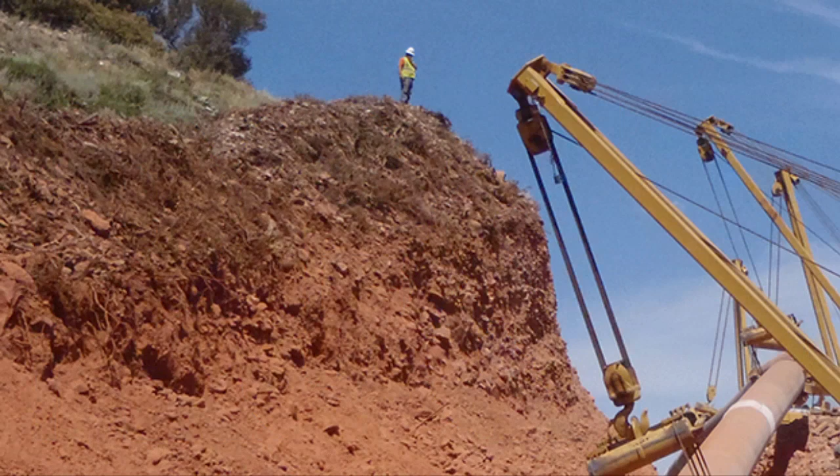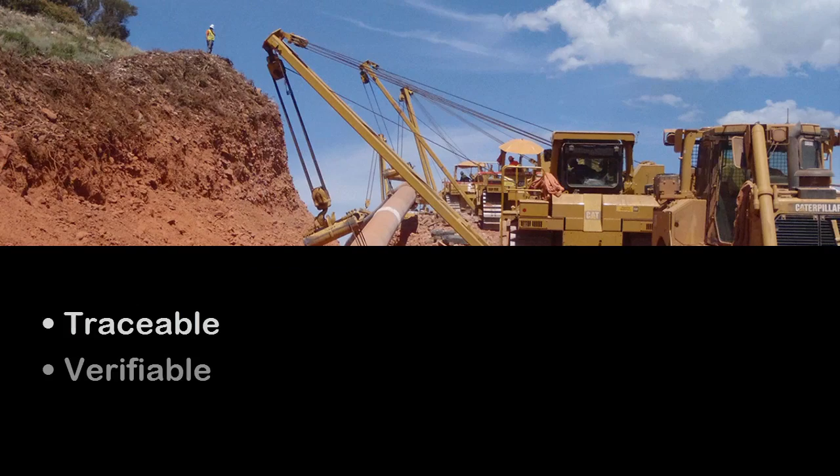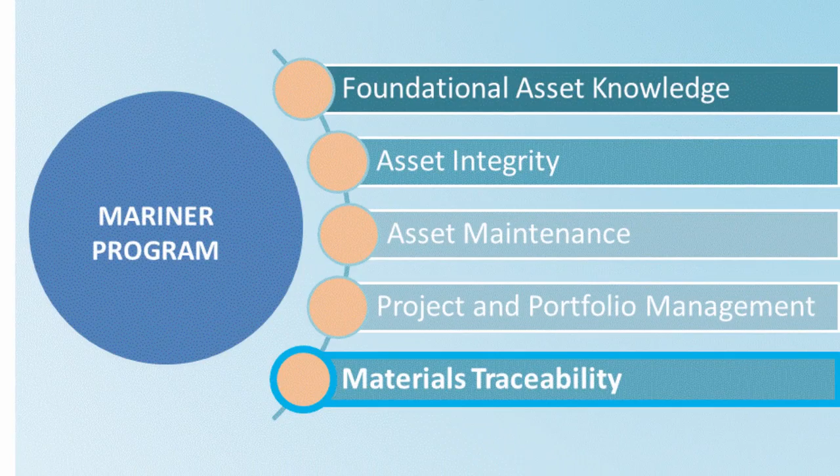Materials traceability is one of a suite of improvement initiatives that make up the Gas Operations Mariner program. This project establishes an industry-leading standard and process to ensure gas transmission materials and components are traceable, verifiable, and have complete materials records. Like the other Mariner programs, Materials Traceability is an initiative created to enhance the safety of PG&E's gas transmission system and improve the accessibility and reliability of pipeline system asset information.

Materials Traceability represents PG&E's high-level compliance commitment, launched as part of the 2011 Pipeline Safety Enhancement Plan filing. By December 2015, it will be fully deployed and integrated into our core business process.

Materials traceability will enhance public safety by establishing an industry-leading standard and process for gas transmission. It also ensures that all related gas asset information is accurate, complete, and readily accessible.

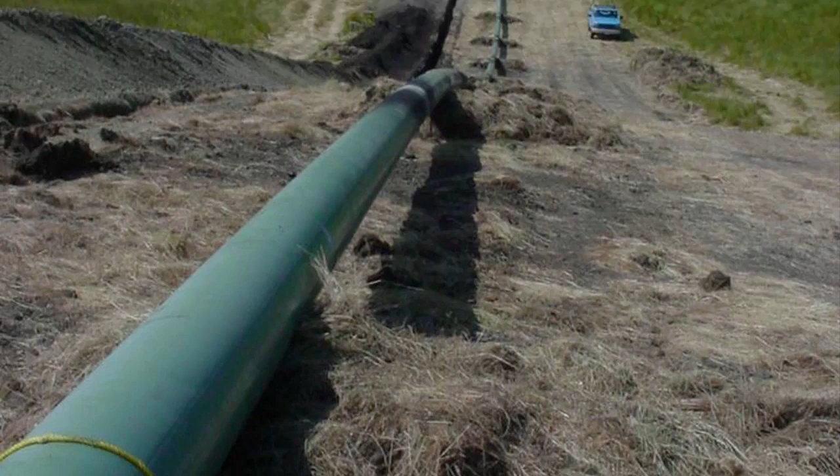Here at PG&E, we understand the importance of tracing materials used in our pipeline systems, and we are committed to meeting and exceeding our regulatory compliance requirements.

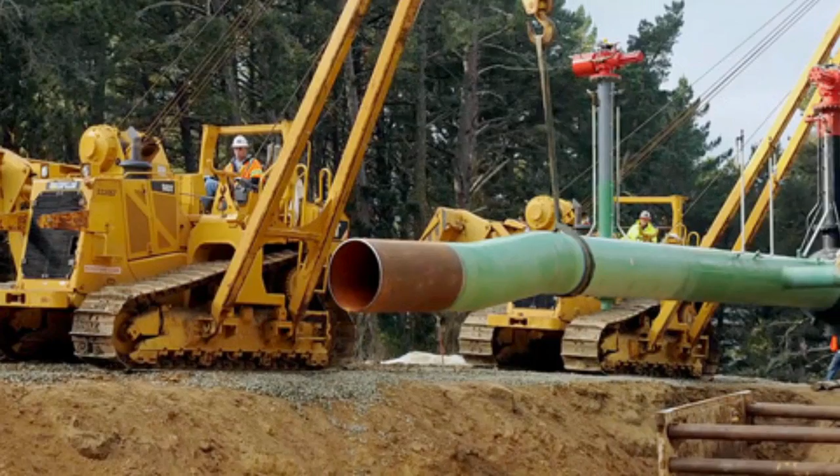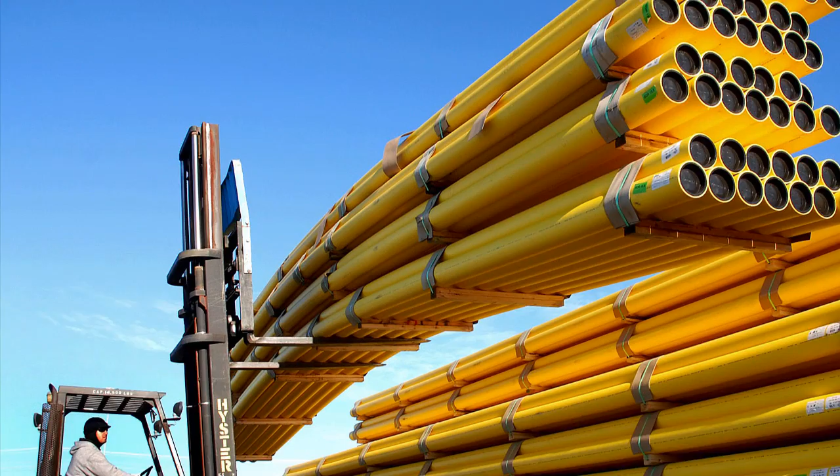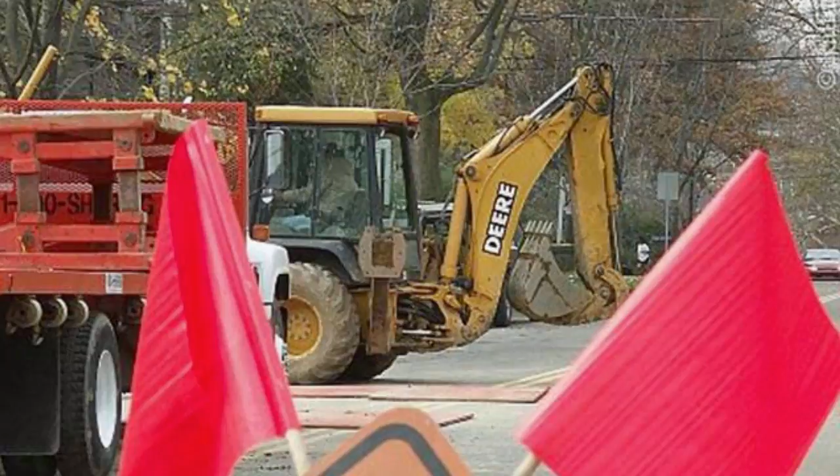By December 2015, our existing business processes will be enhanced with the ability to track materials origin and locate where batches of gas transmission materials are installed within the system. Also, we will have easy access to complete materials information for all transmission assets, preventing issue and installation of recalled or non-qualified materials.

In order to become the safest, most reliable gas company in the United States, we need to transition to modern data management systems.

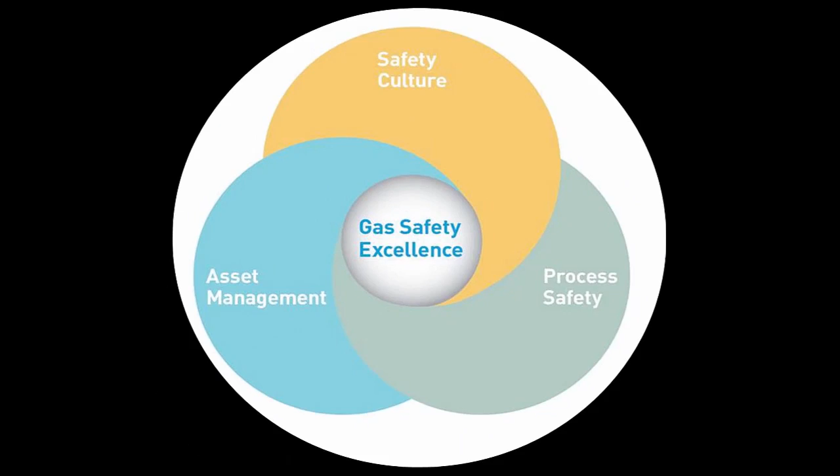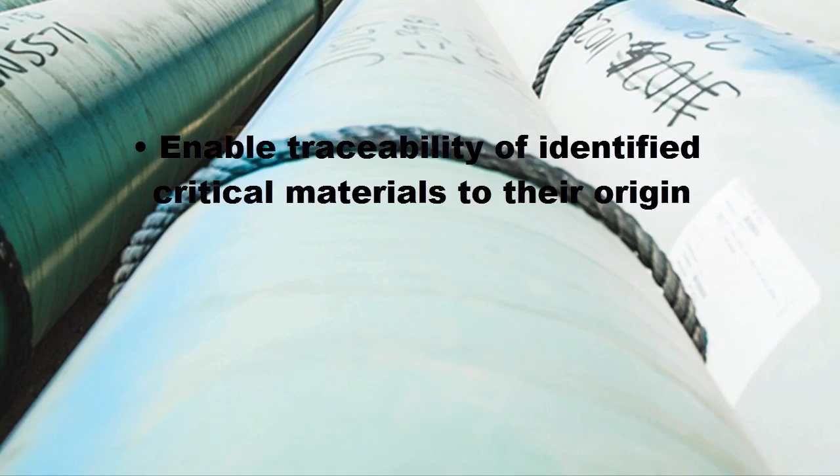What are the benefits of materials traceability? Using a combination of materials tagging and SAP batch management functionalities, the project will enable traceability of identified critical materials to their origin. It will enable PG&E core systems to capture and link traceability documentation to materials.

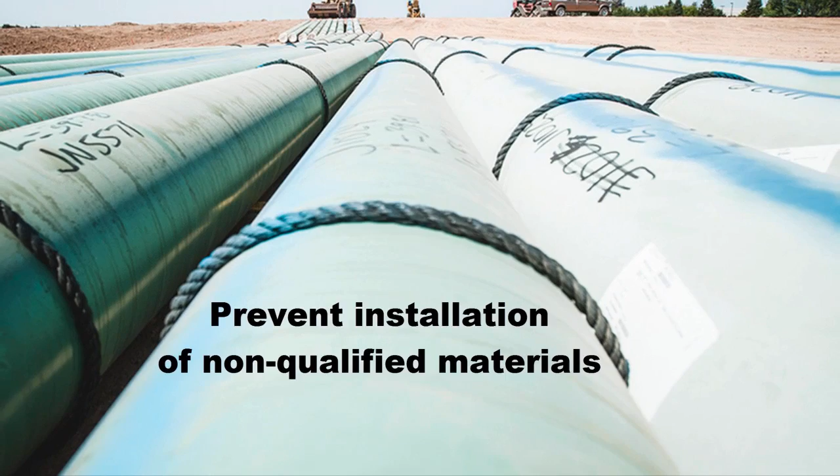We will ensure that materials issued to a construction job are traceable and remain traceable. We will prevent installation of recalled or non-qualified materials and identify where traceable materials are installed.

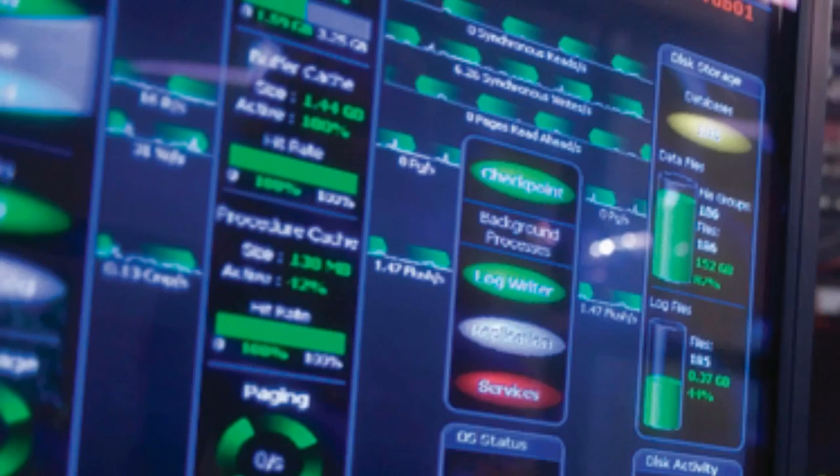Enhancements will include the use of SAP and Documentum to capture and manage the necessary information to ensure traceability, and will minimize the paper and manual steps needed for critical materials information to flow through to a construction job.

Materials traceability represents a lot of change. For many, it will represent the trifecta of people, process, and technology change. Numerous departments will be impacted, resulting in the adjustment of some current processes as well as the creation of new processes. Who was involved in the change design?

Experts from various organizations impacted by this initiative have participated in its development, testing, and deployment planning. From initial requirements workshops to final testing in the field, the team has consistently sought out the ideas, concerns, and recommendations of those affected by the changes.

It's big. Materials traceability impacts multiple PG&E organizations, as well as our materials suppliers and third-party business partners. From codes and standards and engineering and design personnel to supply chain teams such as sourcing and procurement, supplier quality assurance, and warehouse, to PG&E and contract construction crews, materials traceability will affect the daily activities of our employees, contract resources, and suppliers.

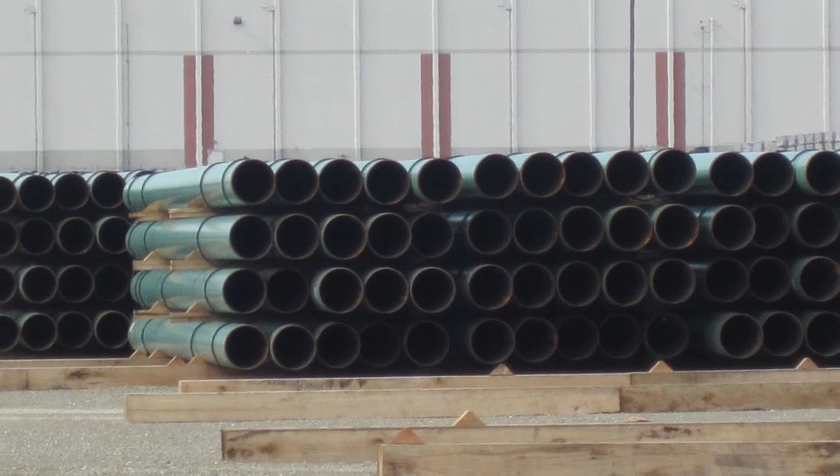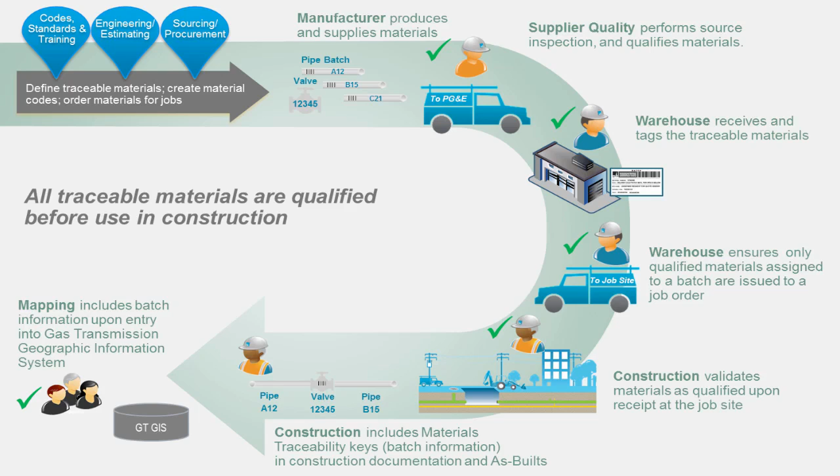You may be familiar with this image. It shows you how the Materials Traceability Project touches on the work of many different people representing various work groups throughout the PG&E system. From end to end, the Materials Traceability work processes represent a comprehensive solution that will enable us to ensure records are traceable, verifiable, and complete.

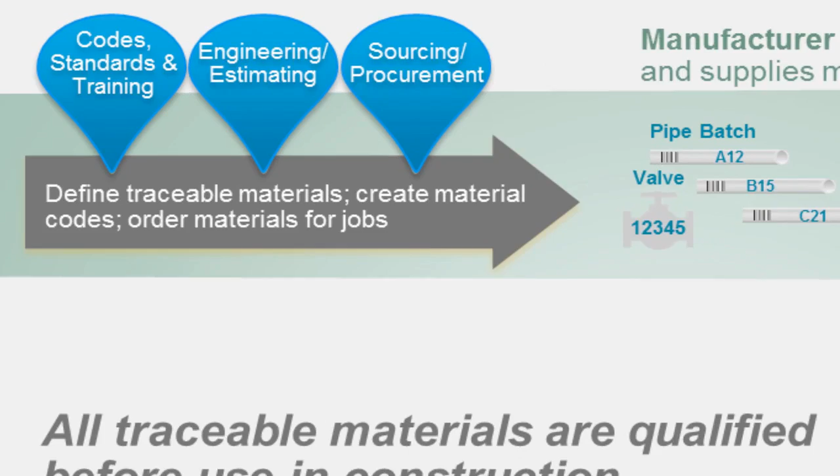Let's look now in more detail at how each work group is impacted by the Materials Traceability Program implementation.

For codes, standards, and training, the Materials Traceability Initiative means developing, documenting, and publishing new PG&E procedures for traceable materials. It also means that code, standards, and training will switch to reviewing and approving material test reports in SAP instead of by email communications. Moving on to pipeline engineering and design, within the materials traceability process, engineering will reconcile the bill of materials to ensure all traceable materials have material codes.

Sourcing and procurement will ensure all traceable materials in SRM shopping carts have material codes and not text-based descriptions. Keep in mind that regardless of the procurement method, all traceable materials are now required to have a material code. And in order to ensure that material codes are created in a timely fashion, code standards and training, engineering, or sourcing and procurement can submit a new material code creation request.

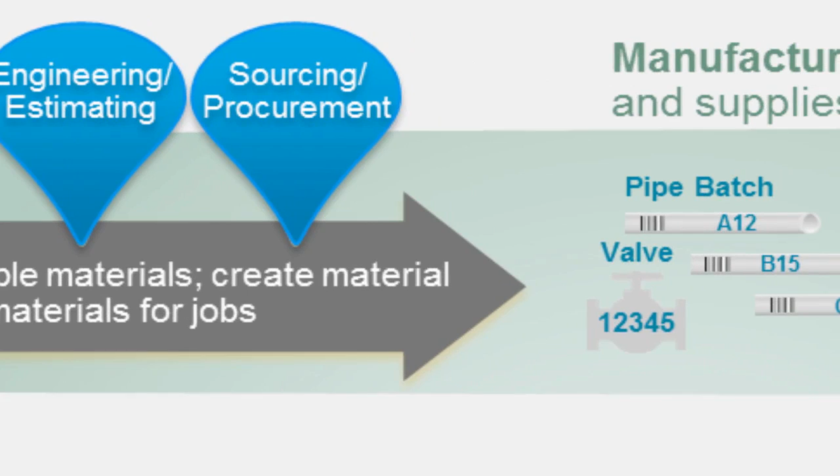The Materials Traceability Initiative requires manufacturers and vendors to provide additional material information. Vendors will notify supplier quality assurance when materials are ready to be source inspected and will ship materials only after supplier quality approves materials as well as the materials documentation.

Materials traceability heavily impacts supplier quality assurance. When the expert materials inspector approves the materials test report, a batch number is automatically created. When they approve the inspection checklist, a notification is automatically sent to the vendors and suppliers authorizing shipment of pipes, valves, and fittings to a warehouse or a job site. Once both the MTR and inspection checklist are approved, the SAP interface matches and links the batch number to these documents.

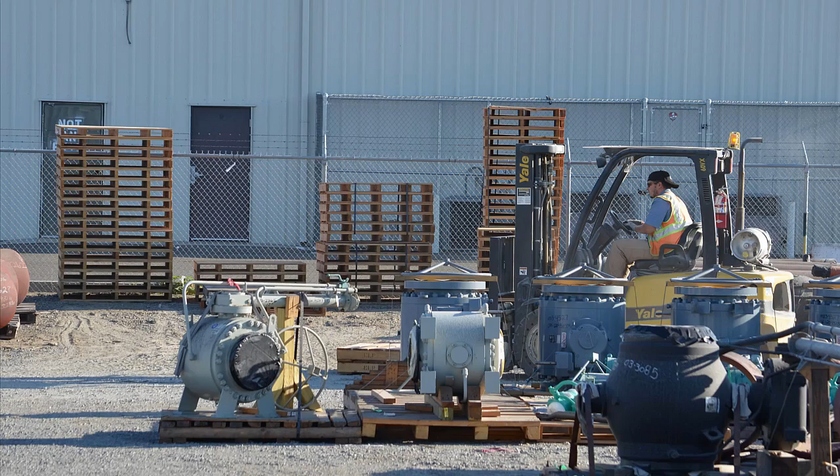Once traceable materials arrive at the warehouse, materials handlers will receive goods. They will also search for the SAP batches associated with received goods by inputting the batch characteristics from their packing lists. Materials handlers will then print and affix batch labels to pipes, valves, and fittings.

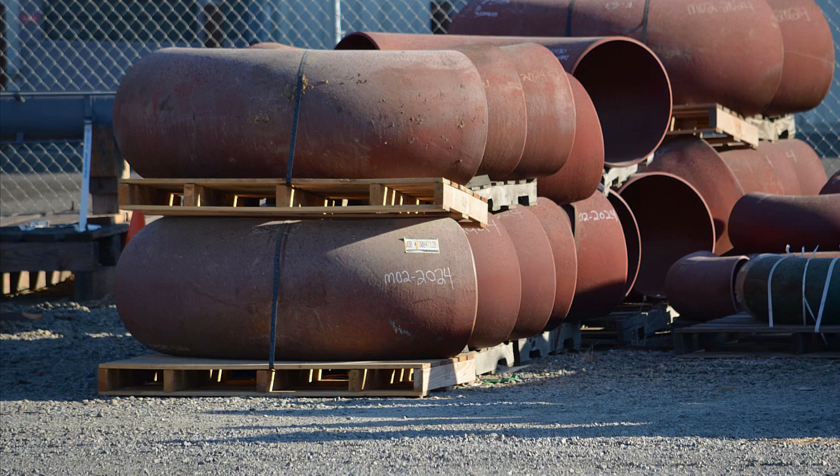When warehouse materials are picked for a job order, materials handlers will also ensure that only qualified materials assigned to a batch are issued to a job order.

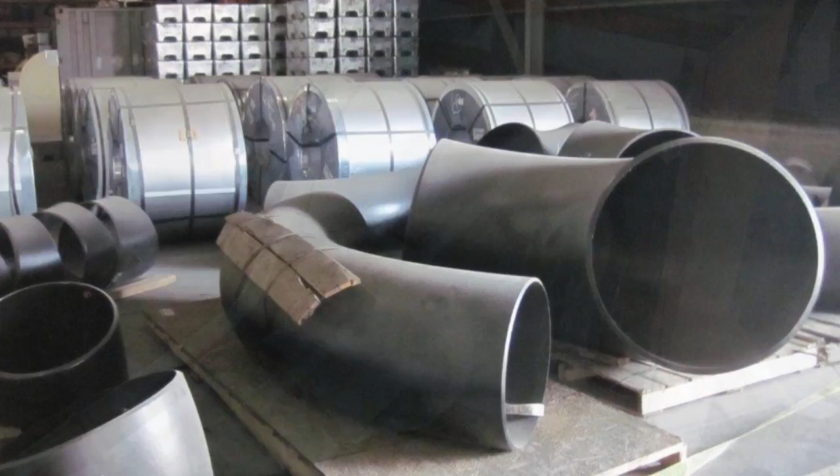Materials will arrive at job sites with batch labels already affixed. These batch labels validate that materials are qualified upon receipt at the job site. PG&E construction teams will record the batch number into the pipe fitting log and other construction documentation such as as-builts.

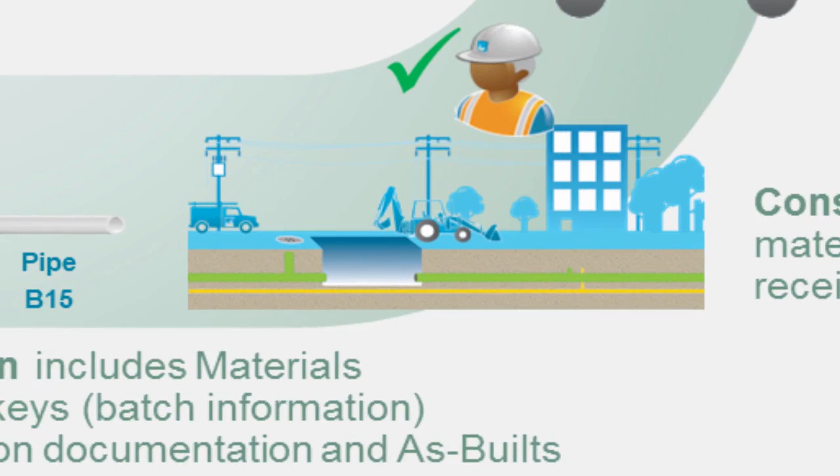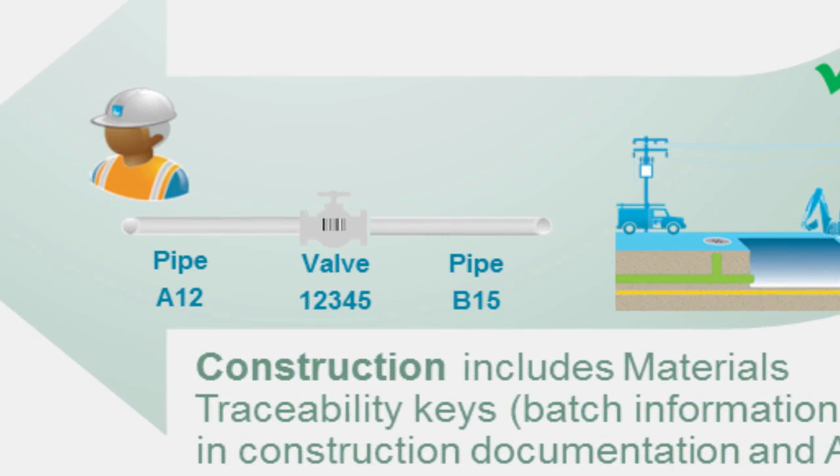To ensure that the materials used in gas transmission construction consistently meet the new traceability standards, all materials purchased must be coordinated through the supply chain, sourcing, and procurement organization. In keeping with current PG&E practices, P-cards are not to be used for ordering any materials that are traceable, coded, or a PG&E warehouse stock item.

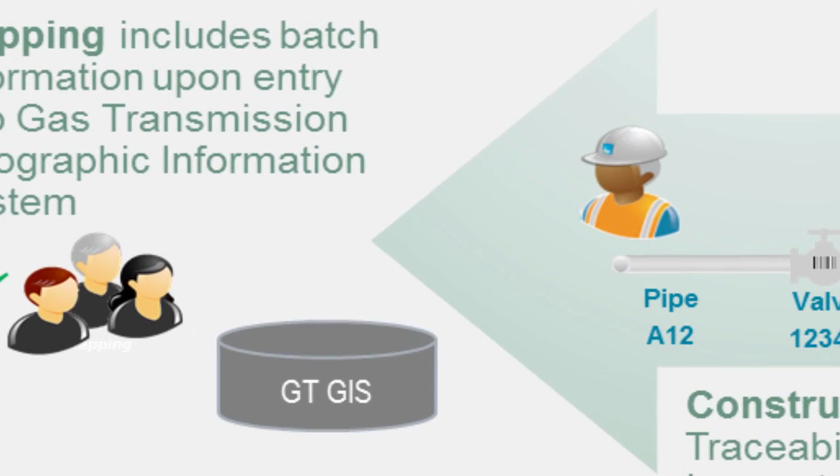Lastly, mapping retrieves the batch number from construction's pipe fitting log and enters it into the gas transmission geographic information system.

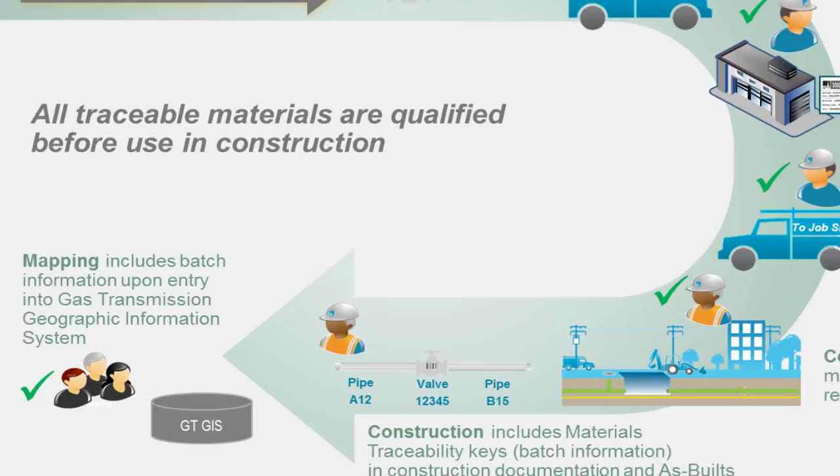We're all in this together. This project impacts many of us. Together, we share a vision of safety and reliability.